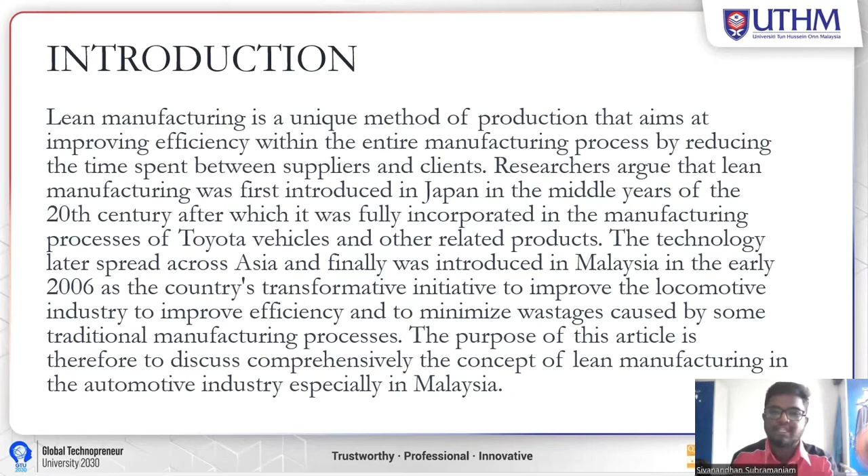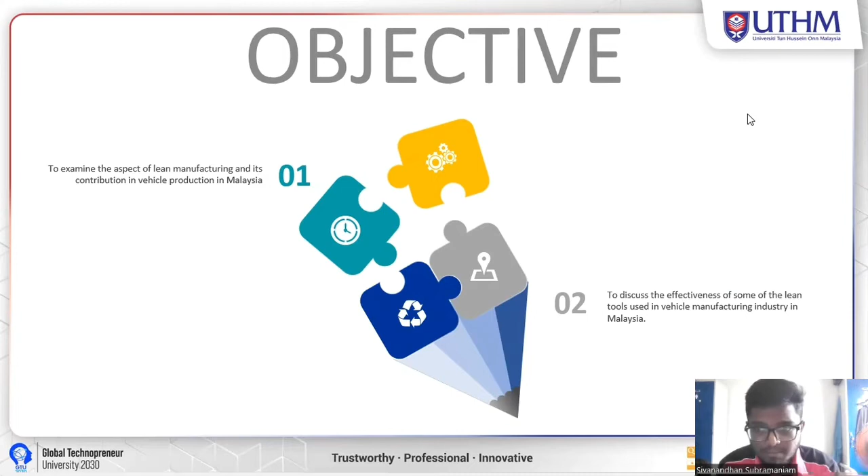So the purpose of this case study is to discuss comprehensively the concept of lean manufacturing in the automotive industry, especially in Malaysia. The objective of our case study is to examine the aspect of lean manufacturing and its contribution to vehicle production in Malaysia, and to discuss the effectiveness of some of the lean tools used in the vehicle manufacturing industry in Malaysia.

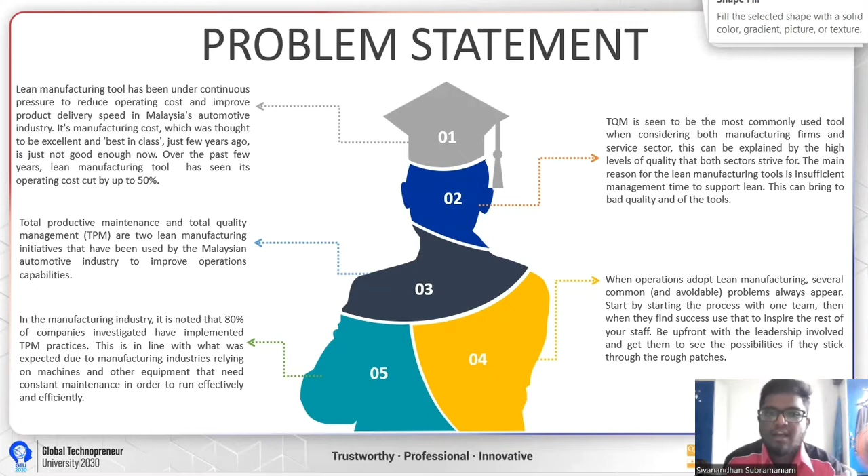Besides that, TQM has also been the most commonly used tool when considering both manufacturing firms and the service sector. This can be explained by the high levels of quality that both sectors strive for, especially industry in Malaysia. The main problem for lean manufacturing tools is insufficient management time to support lean. This can lead to bad quality of the tools. Last but not least, when operations adopt lean manufacturing, several common and avoidable problems always appear. When they find success, use that to inspire the rest of their staff. Be upfront with the leadership involved and get them to see possibilities if they stick through the rough patches.

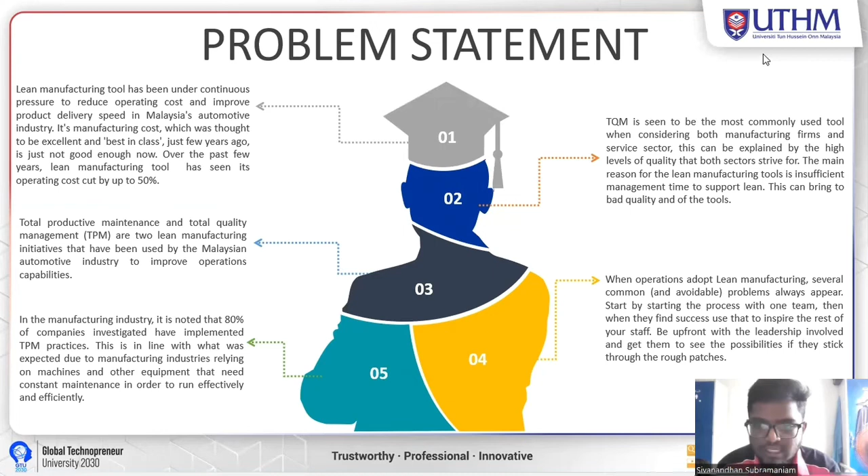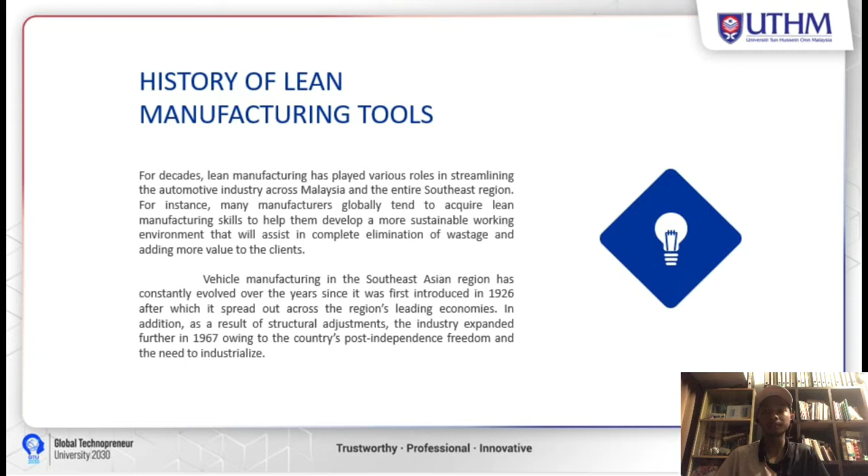In this regard, in order to achieve sustainability in the process of waste management, producers must be capable of identifying all the components that do not add any value to the organization and also to the environment. Such wastes could be in the form of underutilized time, money, skill sets, excess inventory, and also technologies. In lean manufacturing there are more than 50 tools, but this chapter will discuss a few of them. So the first one is the 7 wastes. The 7 wastes, known as muda, are the various forms of inefficiency that the lean production system seeks to eliminate. Waste is something that contributes no value.

By definition, you may increase the productivity and return on investment of your manufacturing plant by eliminating these types of inefficiencies. The second one is total productive maintenance, or TPM. TPM is a technique for increasing equipment reliability and lowering operating costs by utilizing machinery, tools, and operator expertise. It is a comprehensive method of maintenance that builds on proactive, anticipatory, and self-reliant maintenance. The last one is continuous flow, single piece flow.

This ideal process involves the uninterrupted movement of a single product from one operation to the next. The factory will be able to spot any fault with the process right away and eliminate the need to keep a lot of work-in-progress stock by utilizing continuous flow.

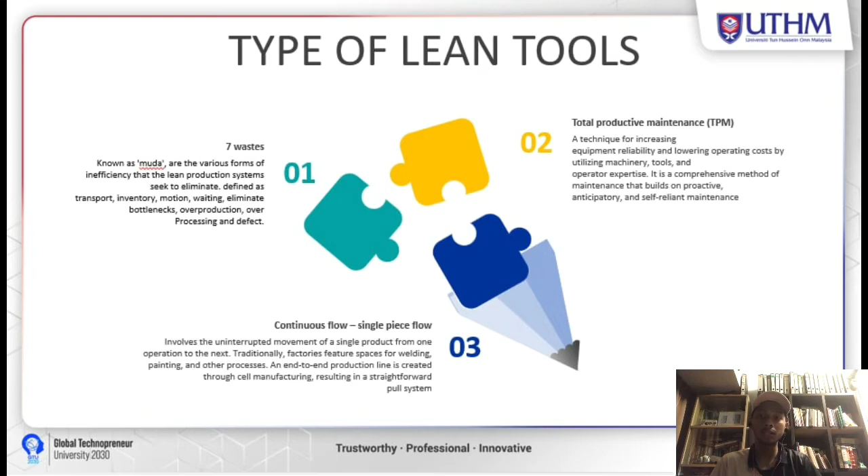Today, I'd like to talk about chapter 3, which is the discussion about the comparative studies of lean manufacturing tools used in the automotive industry in Malaysia.

So the first one is lean system used in automotive industry in Malaysia. Lean manufacturing has constantly evolved from the initial applications in Japan to other global companies and production channels. The lean systems comprise the management strategies and philosophy of the manufacturing process based on a long-term timeline to revolutionize. So, in Malaysia, the lean system has contributed in the handling of extensive inventories and production data, thus minimizing wastage and obsolescence.

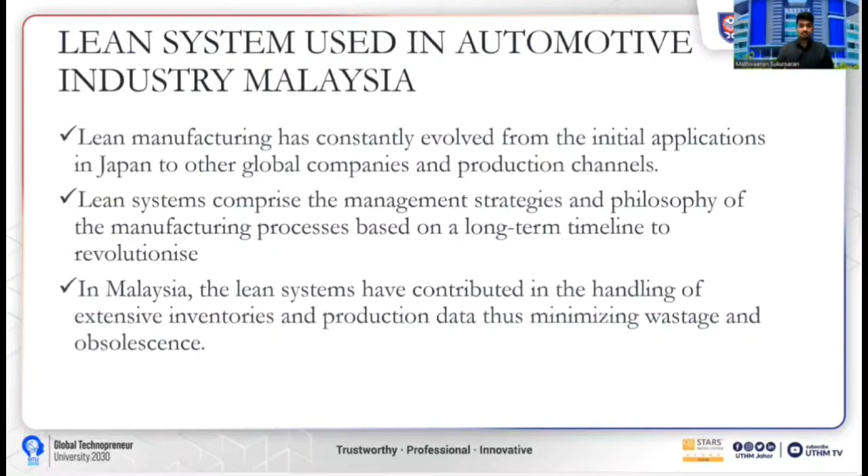And the second one is factors influencing selection of lean manufacturing tools in the automotive industry in Malaysia. To minimize undue waste and irritations, it is desirable for an organization to choose the right lean tool. Some of the factors that influence lean are the ability to gain support from the top management, the ability of the workplace to perform lean tools and techniques. The third one is the tools and techniques of choice, the level of difficulty to carry out. And the last one is the implementation of lean tools and techniques following the direction of the organization, strategic planning or goals.

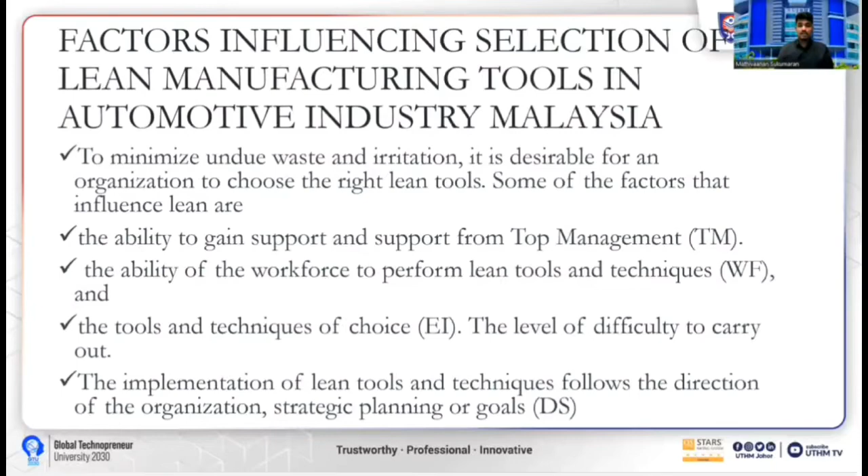For the third discussion, which is effectiveness of lean manufacturing tools used in automotive industry in Malaysia. Various investigations in Malaysia have been linked to the implementation and development of lean manufacturing tools and techniques, particularly in the automotive industry, electrical and electronic, and food and beverage sectors in order to obtain better performance improvement. According to a recent survey, there are 10 lean manufacturing tools identified, such as 5S, housekeeping, cellular manufacturing, Kaizen, continuous improvement, Poka-yoke, mistake proofing, standardized work, value stream mapping, Jidoka, Kanban, plan do check act, and total productive maintenance.

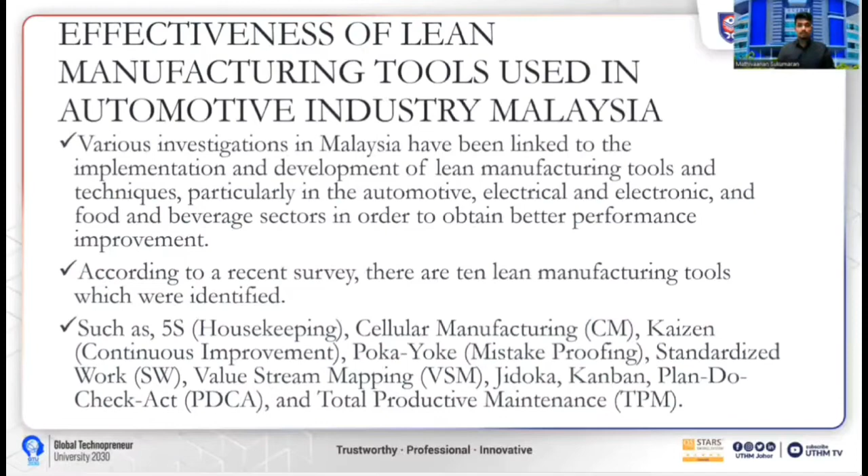So based on table 1, awareness level of lean tools and techniques, the mean score of the 5S is 3.75, which is more than standardized work and Kaizen in awareness level of lean tools. Many understand the concept of the 5S tool and technique to help reduce the waste successfully.

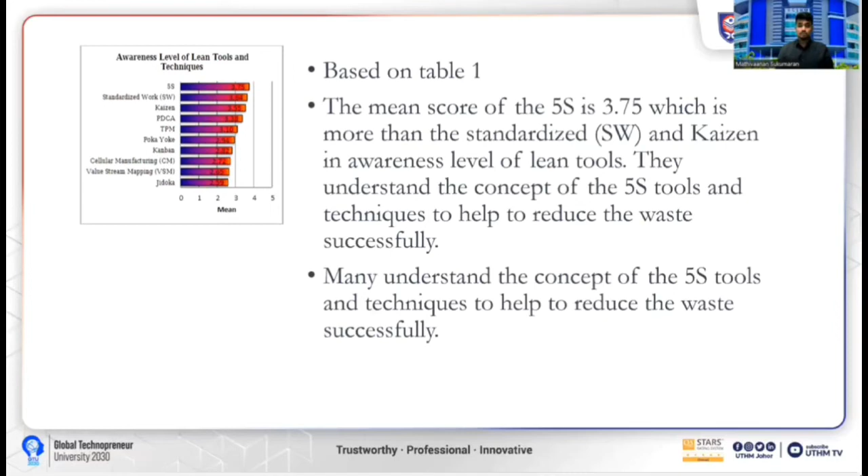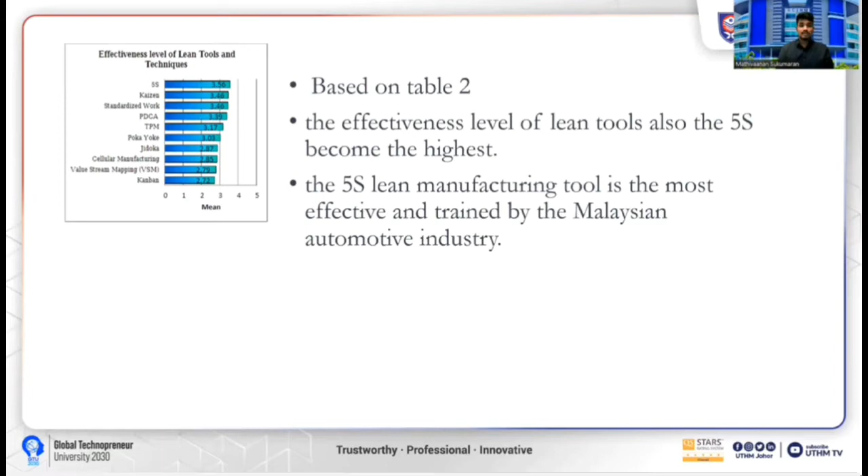So based on table 2, which is effectiveness level of lean tools and techniques, the effectiveness level of the 5S also becomes the highest. The 5S lean manufacturing tool is the most effective and trained by the Malaysian automotive industry.

Last one, implementation of lean manufacturing tools in automotive industry for a better future. JIT emphasizes the proliferation of e-commerce.

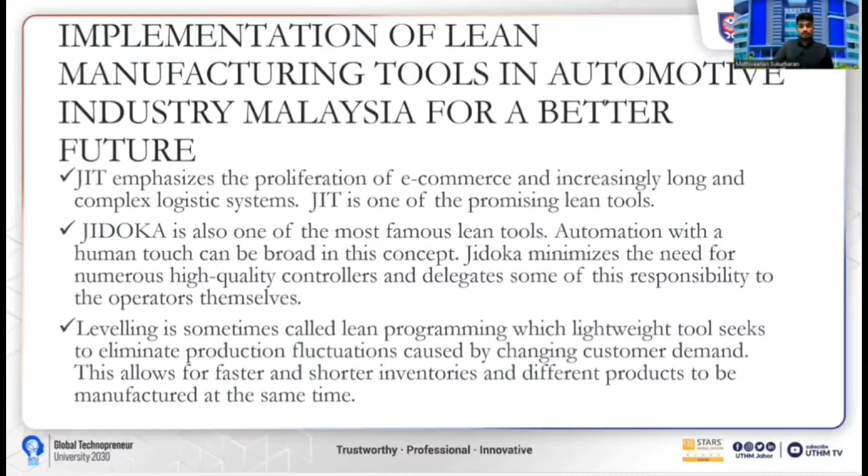So, in this conclusion, we can conclude that to successfully implement this system, business organizations and vehicle manufacturing companies in developing economies like Malaysia must consistently collaborate with companies from developed vehicle manufacturers like Japan. This will not only help in minimizing wastage, but will also help in development of people's skill sets and the overall quality of the manufactured automotive equipment and other related products.

This observation also implies lean implementation is a knowledge-intensive phenomenon, implying that top management in Malaysian manufacturing companies must have a clear vision and strategic initiative, a high level of education, and a willingness to support productivity improvement. However, Malaysian manufacturers should be aware that not all waste can be addressed unless firms fully implement lean to address all types of variables concurrently.

Malaysian manufacturers must understand that lean implementation is a continuous process, and that long-term investment in lean activities should not be viewed as a waste of resources, nor should they expect immediate return. So, hopefully, the next study will be able to improve on the findings and provide new data toward the development of a feasible and systematic lean manufacturing. So that's all from us.